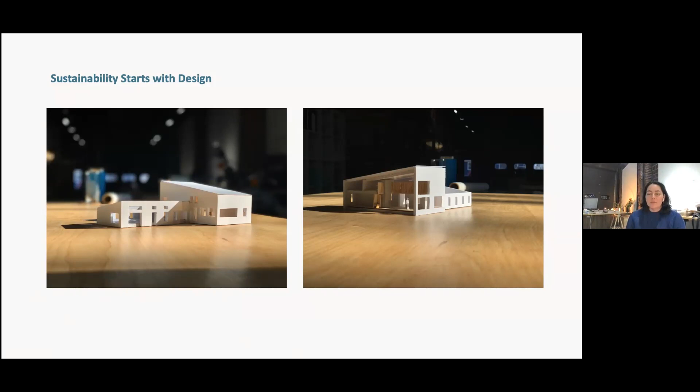Hi everyone, my name is Judy Obersi, I'm the other half of Habit Studio. I'll start by talking about how sustainability starts with design, because we believe that being thoughtful about the design is critical to meeting the client's needs for longevity. Timelessness and flexibility of function are also important, because spaces that make people happy means they will take care of them. So design is the main driving force, the guidance through our work.

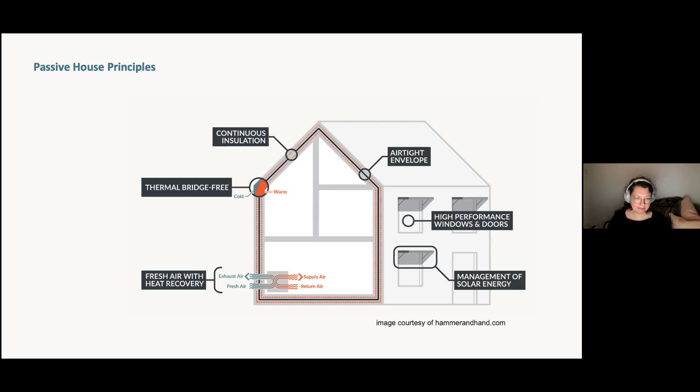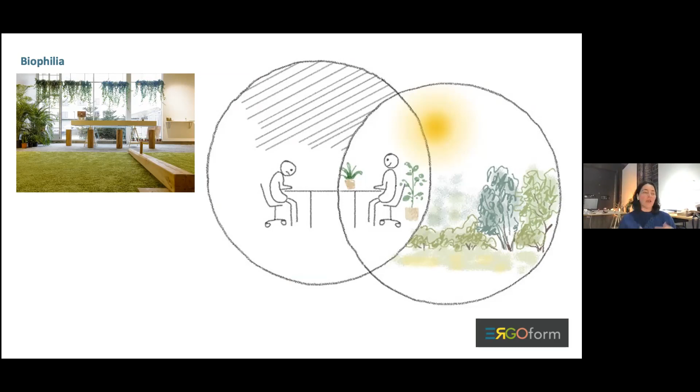When we talk about design for the senses, it's a reaction to thinking about our environment, not just about the visual. We're going to show you a lot of pretty pictures during this presentation, but the space and your experience of it really influences how you feel, how you behave, and how you think. The visuals are probably actually less important than the other senses in how they impact your health, your comfort, your happiness.

If you think about qualities of spaces you've been in that have had amazing sound or quiet, about the way light moves in a space, and also shadow - there are differing moods and feelings you have in these experiences. Then the materials we surround ourselves with and their tactile qualities also evoke different senses, whether it's rough boards or smooth metal. You've probably encountered a stairway where it was irresistible to hold your hand along the handrail because it was ergonomically pleasant.

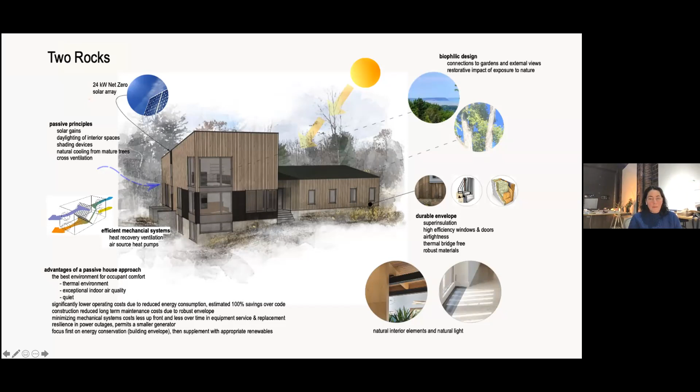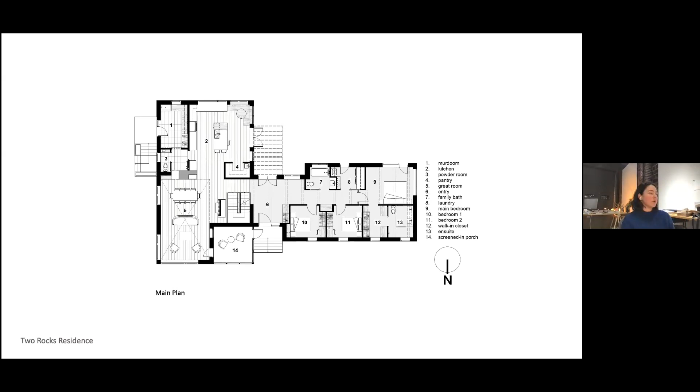I'm not going to get too much into the floor plans - I just wanted to give you a sense of the shape of the building. This is the main floor plan of Two Rocks. Generally there's a public wing to the left of your screen and a private wing to the right, to the east, connected by an entryway. In the public wing, that's where we have our living room, dining room, kitchen - they're all visually connected and focused to the view on the north. The main bedroom is very much connected to the forest.

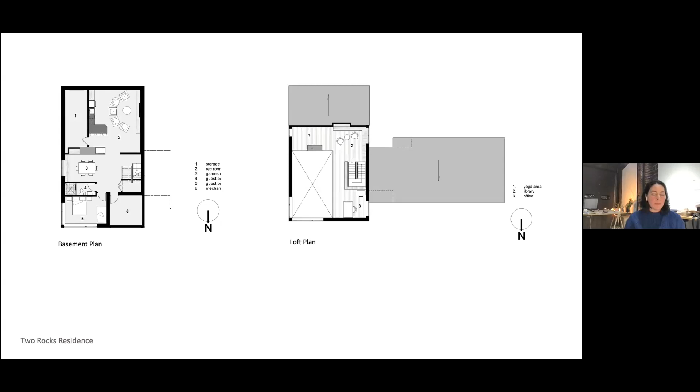Underneath the public wing there is a basement, which has a games room, a TV area, the guest bedroom and bathrooms. Then on the same public wing, there's a loft on top of the main floor that has a library, a yoga space, and an office.

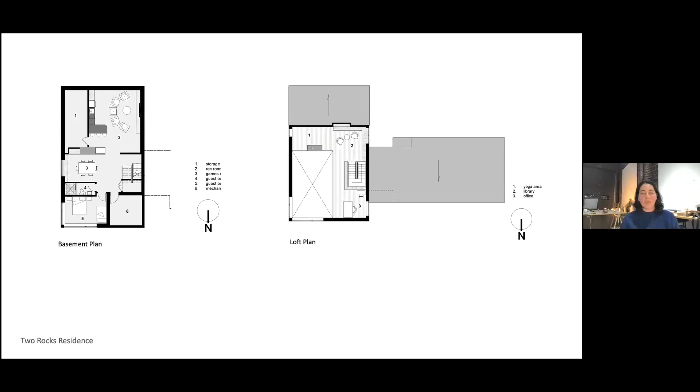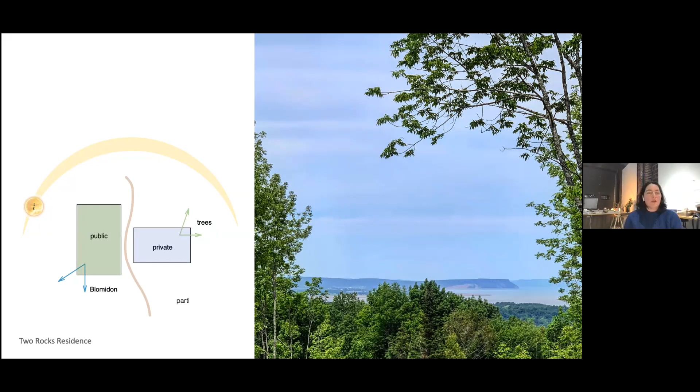This slide shows how we energy model. One thing about having a passive house is that there's a big difference between a conventional house, in the sense that we have to do an energy model. With a conventional house, you're basically guessing at whether your house will be comfortable or not, and whatever it lacks in comfort, you supplement by turning up the heat, opening a window, or putting in air conditioning. Whereas with an energy model, you can actually very accurately predict what your comfort level is going to be. In many ways, the energy model explains to us how to do a passive house.

One example is in this Two Rocks project. Our building is very much about the views, and our view in this case was to the north. We looked at the energy model, and the graph on the left shows two things: the transmission losses we get, meaning energy losses through your windows, and the green represents the energy gain. What you can see is that on each side of the house, depending on where you get sun or not, on the north side the sun typically doesn't shine in, so we ended up having more energy losses than gains. This was because of the big window that we needed for that view.

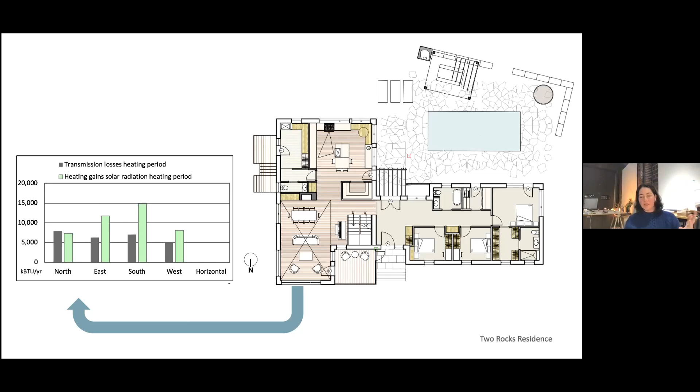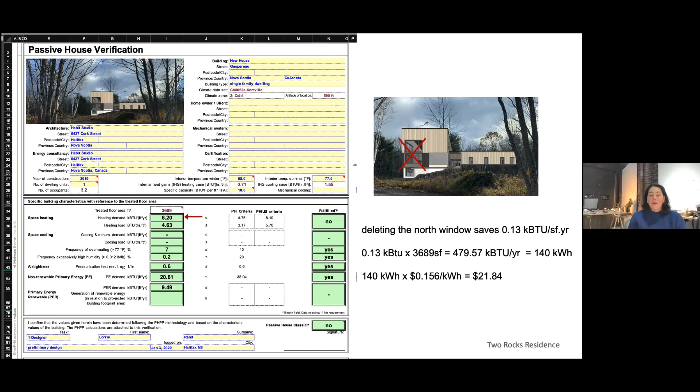With the energy model, we were able to exactly calculate whether it was worth it to keep that window or not. Lorrie did the calculation, and we speculated what would happen if we got rid of that window, or made it smaller. How much would we save? Is it worth it? The conclusion was that you would save about $22 a year in energy consumption, which made us realize that who would want to give up this view to save $22. So we decided it was worth keeping it, and the entire house was designed around the views. This was an important thing to look at.

Passive house, we basically see it as a tool that can get you the best house possible.

What are energy models if not for giving you good numbers to work with? Our clients received their report from their evaluator about energy savings. What you can see here is a house comparison chart on the right that shows a house built to code and how much they would be expected to spend, both from fuel cost as well as greenhouse emissions. The house built to code would have to pay about $6,098 for a house of this size in energy costs. Our clients ended up getting back $1,150, so their annual saving by going with passive house and a solar array was almost $7,250. Best of all, they saved 28.4 tons per year on annual greenhouse gas emissions.

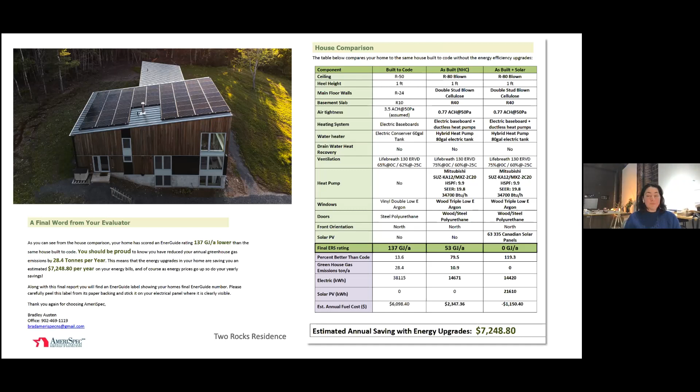I'll let Lorrie take this slide. Yeah, sorry, this is a very vague slide, I just threw it in from another presentation. I think I should take a step back, because when I explained passive house, I probably should have talked a little bit about why. Harvey had a question in the chat about why, and passive house was developed as a way to use science, meaning using physics and economics, to build the best house possible.

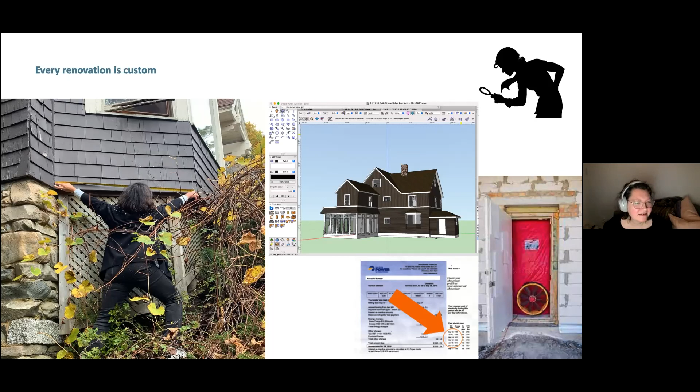So I'm just going to talk about a couple of renovations, kind of common things that happen. One of the things that almost every project, the homeowners are asking for more sunlight. Their houses are too dark. This is a townhouse where the owner lived on the north side, and their entire south wall was shared, so they had very little opportunity for daylight.

This is about an 1870s or 80s era house in Halifax. We didn't really touch the two front rooms, the dining room and living room, but we completely reconfigured the back end of the house where the kitchen was. This kitchen and bathroom at the back, the back bump part of the house, had no insulation and no heat source.

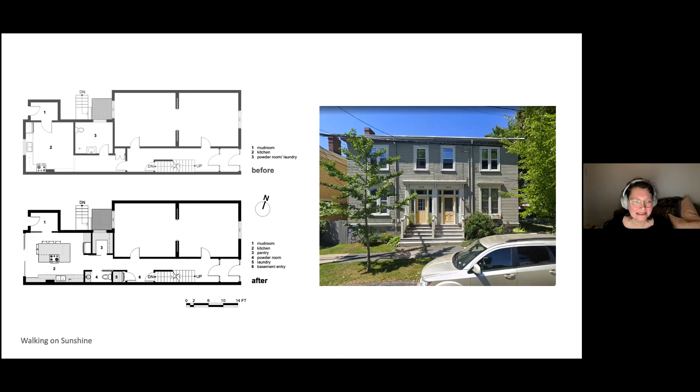They were coming to us asking for sunlight, and we said, you need a lot more than sunlight. So the project was quite a bit more expensive than they were hoping for, because they basically just wanted this big door. They just wanted a great big door at the whole back end of the house, and we gave them that door.

This is a west facing garden door. The concern with this is overheating. In Nova Scotia, in Canada really, we always get solar gains from the south and lose energy from the north, and to a smaller extent the east. But we frequently experience overheating from the west because the sun is lower in the sky, and there's more heat in the western sky sun.

So it was a concern to put this door here, but they have a massive cherry tree in the backyard of this house, you can only just kind of see it. It was a little bit experimental, and I think on the hottest days of summer they are a little bit warm, but they can also open that door. It's a 12-foot wide door that opens in the middle.

In the course of doing this work, we insulated the whole back of the house. We put in-floor heat in the slab. It's not actually a slab, there is a basement in this part of the house, so we put in radiant in-floor heating.

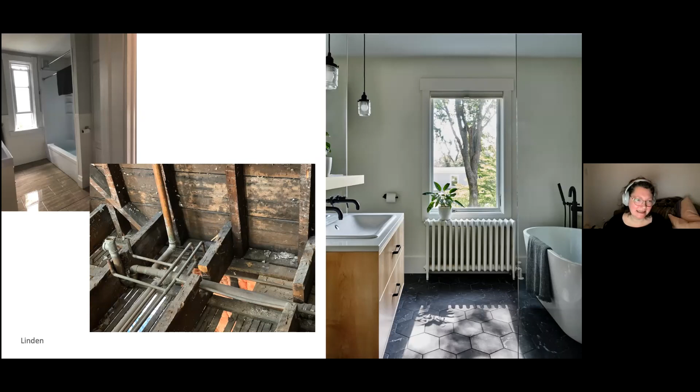The clients, we had lots of discussions with them about what we were going to do, like what parts of the flipped renovation should we save. They felt a bit guilty about ripping up this bathroom. Then we ripped it up, and we found that probably if they hadn't done it, they were going to have some very serious structural issues in future. So this isn't really so much about a sustainability problem as an inherent problem to retrofits, but it's something we always have to have in mind.

So now we're going to talk about this project in a little bit more detail. We're calling this one Magnolia.

This is a lake house on Chocolate Lake in Halifax, just on the other side of the peninsula. It's a 1950s era house that had a very strange series of renovations done to it, maybe in the 1980s or 90s.

We started working with the owners right after they purchased it, with the intent to do a renovation. Primarily the renovation was driven by functionality—that's the primary driver in a lot of our renovation projects. People want to renovate because their house just isn't working for them. But in the course of improving the layout and aesthetics, we always manage to sneak in some, or in some cases lots of, sustainability measures into the project.

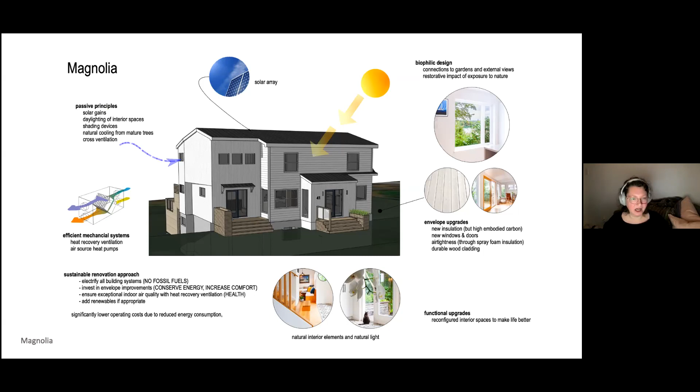Do you want to jump forward, Judy? So in this house, let's quickly go through the before and after. This is the basement, and I see there were some questions that Judy was answering about the basements.

We believe this house had a basement renovation that was the consequence of an oil spill, but they only partially remediated the space. It was a really weird space where you'd walk down the stairs, turn right through this sort of tunnel-like space, turn right again, then turn right or left, and right again, and right again. This middle part of the house had a few steps shown on the plan, where you'd step up, step down, step up again, and the ceiling height was under 7 feet in most of it. It was just a nightmare.

Very big labyrinth. So we did two things: we kind of opened it all up, but we also lifted this house. The main floor was elevated off of the basement by about 2 feet, and that facilitated getting more daylight into the upper levels and more headroom, making this space functional.

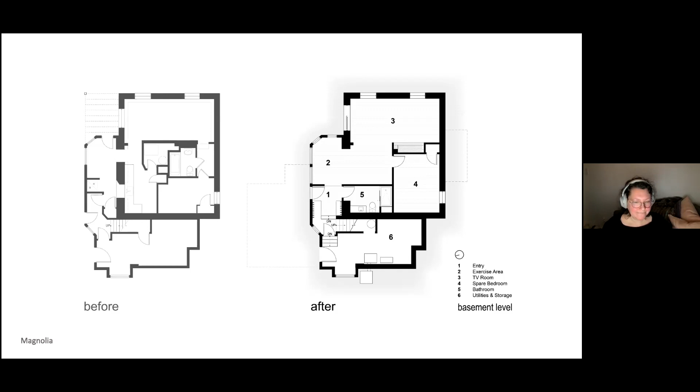And the main level, we moved their kitchen. You can see it's divided in the original house - there was a long, skinny sunroom, the kitchen in the middle of the house, and then a couple of rooms that were kind of used both as living rooms, but I'm assuming one was the dining room. The room behind the kitchen was actually set up as a living room, and the dining room was the long, skinny room on the end. Really, those rooms were quite inward focused - they weren't taking advantage of the lake views at all.

So what we did is really open it all up. We added a small addition on the front, and we were forced to add that addition because we needed to replace the stairs, which were excessively steep. We had to make the new stairs to code, and we didn't have enough space in the building, so that front bump was literally forced upon us by making a code-compliant second floor stair.

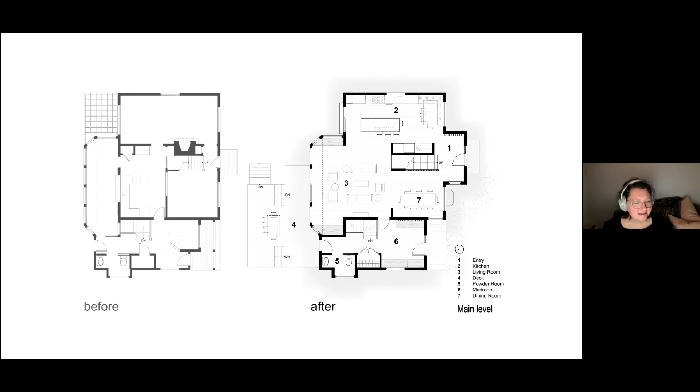And then upstairs was the strangest of all. There were 3 bedrooms, and then the 4th bedroom you actually accessed through another bedroom. It was very low, kind of almost dollhousey dormer kind of ceilings, and quite hard to live in. Several of these bedrooms could only fit like a twin bed. So they were quite awkward and not functional at all for a family.

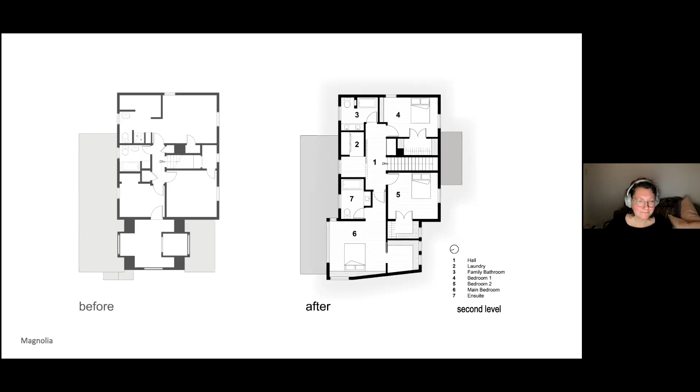And finally, we're turning the tables on ourselves. I think it's a week from today, Judy and I close on the purchase of a building that we bought to be Habit Studio's new home. And now we're kind of sweating because the pressure is on for us to do our own sustainable retrofit. We're our own clients. We're arguing with each other about moving a door.